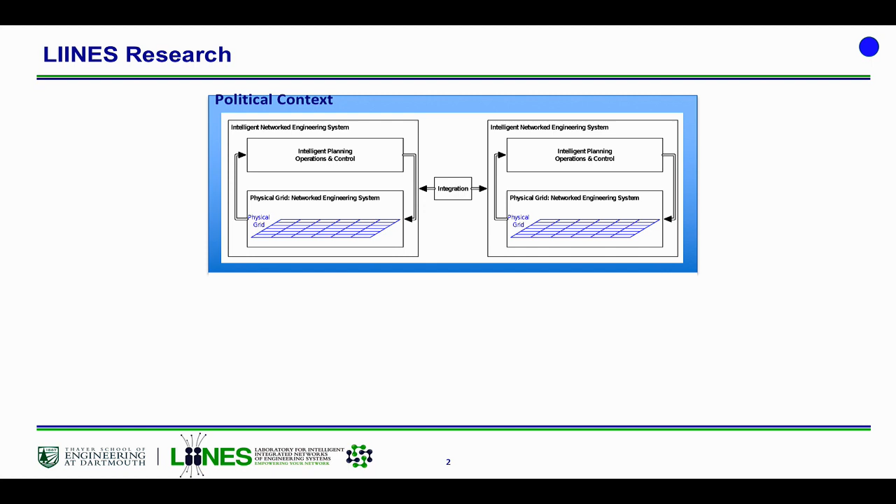Let me tell you a little bit about our lab. The LIINES, the Laboratory for Intelligent Integrated Networks of Engineering Systems, is really concerned with some sort of physical, large-scale network of some kind, and several different layers of planning, operations control, and decision-making on top of that. And if that's not all, what we really would like to do is integrate it with another physical system and other layers of planning, operations, and control. That has led to 5 different research themes that we tend to work on.

I'll be talking today about basically the smart power grids area, but we've also worked in energy-water nexus, electrified transportation, industrial energy management, and interdependent smart city infrastructures.

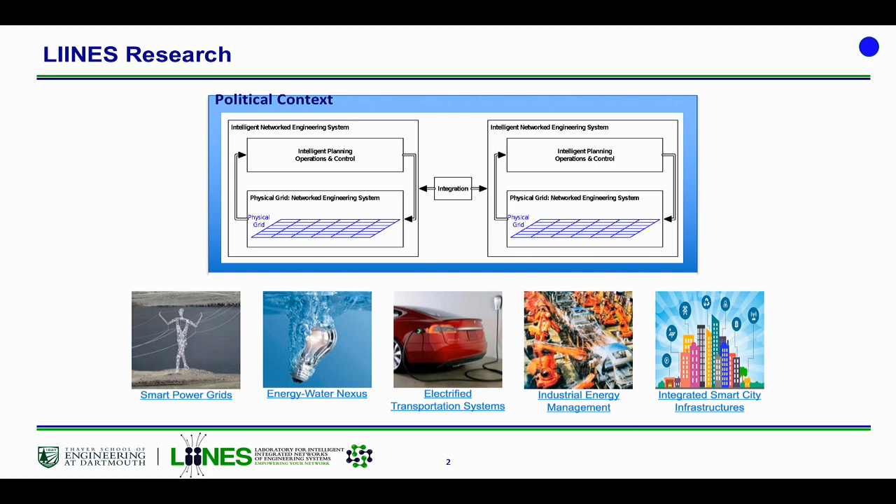Our goal today is to highlight results from the ISO New England Renewable Energy Integration Study. I'm going to cover 5 different topics: a bit of introduction, then background into how our electric power system works and what that means for the integration of variable renewable energy. Then we'll talk about our grid here in New England, the study results, and finally bring the presentation to a close with conclusions and final insights.

Every 7 to 10 years or so, independent system operators like ISO New England will conduct some form of renewable energy integration study. ISO New England did their last one in 2011 with GE Consulting and NREL. What they try to look at is changes in the generation portfolio and also changes in the transmission system. The methodologies for these studies have been evolving, and it's an area we've been working on.

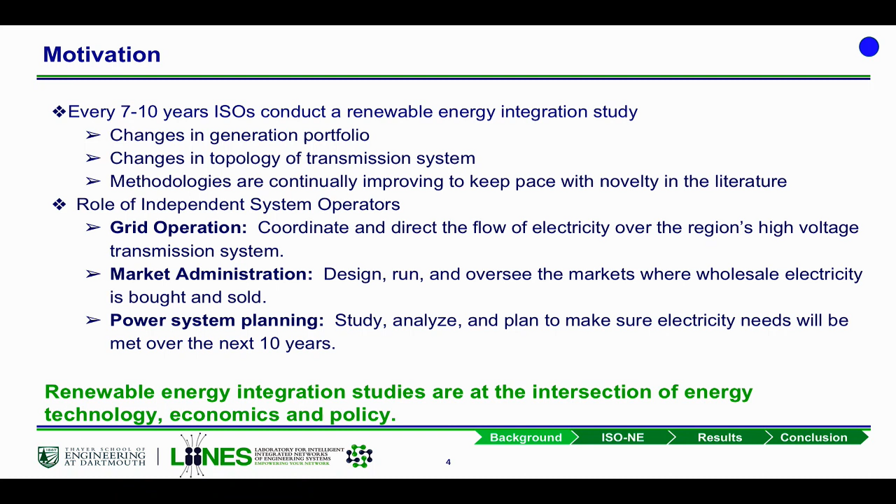Renewable energy integration studies are particularly interesting because they have a really nice mix of energy technologies, economics, and policy. So let me turn it over to Zach.

So what does this power system actually look like? For the last 100 years or more, it's looked like this. You have generation stations producing power. They're stepping up that electricity to high voltage for transmission across long-distance power lines. This reduces losses. Then, when you get to a neighborhood, you'll step down the voltage to a distribution system that goes out to your house or to the college. And in general, this is a one-way flow.

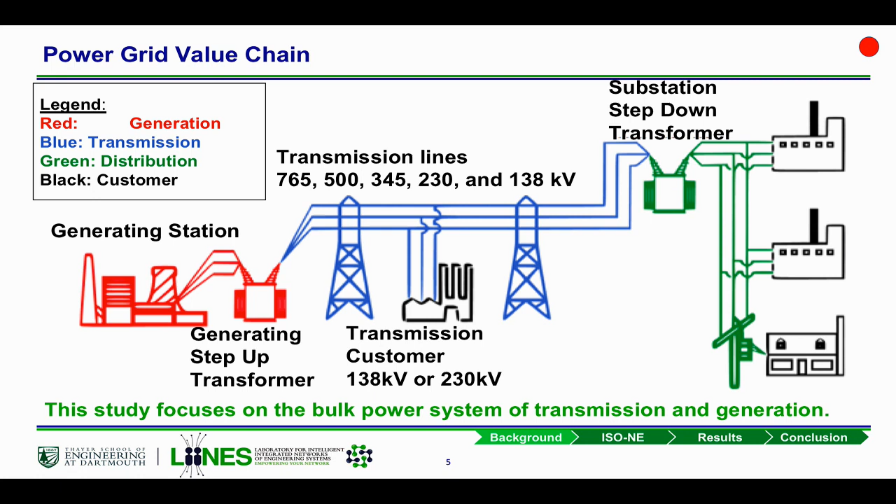And our study focuses from here backwards, generation and transmission.

So in addition to the physical power flows, there's also monetary flows in this system. These include basically an end user who's paying for their electricity to a utility. Then that utility has to pay the generation companies, and the transmission and distribution companies that all help get that power to the end user.

And this is where ISO New England comes in. They're a market facilitator helping to get from the utility back to the generation stations. This is kind of the key piece here that we're really trying to get into.

So you might ask, who cares about this? Why is this important? The key is there's a lot of people that care about this, even in New England. It's utility companies, it's the transmission and distribution system owners that own the wires that transmit the power, it's the regulators in each state that set rules about how much power can be produced or how it can be moved around, the generation companies that actually produce the power, and energy service companies that work with buildings to improve efficiency or provide demand response.

As well as environmental groups that might work with regulators and with utilities to produce renewable portfolio standards requiring certain amounts of renewable generation in each state. The key is that all of these stakeholders help define the scope, scenario, and assumptions that went into this study. Steffi will talk about how these are affecting things as renewable penetrations increase going forward.

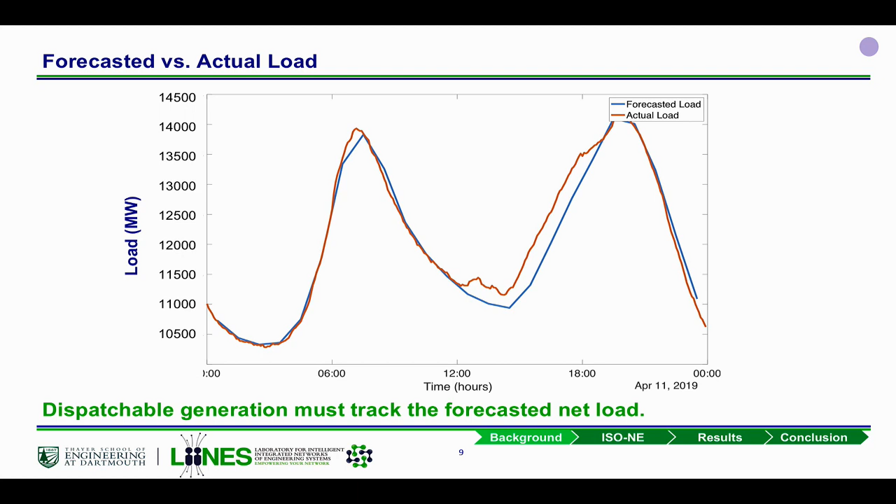As a result of the challenges posed by renewables, system operators usually acquire some reserves to ensure they meet net load variability.

Consider load following reserves: you have a natural gas power plant with a maximum power of 500 megawatts and a minimum power of 200 megawatts, currently producing 400 megawatts. This plant can provide 100 megawatts of upward load following reserves and 200 megawatts of downward load following reserves, which help with variability in net load.

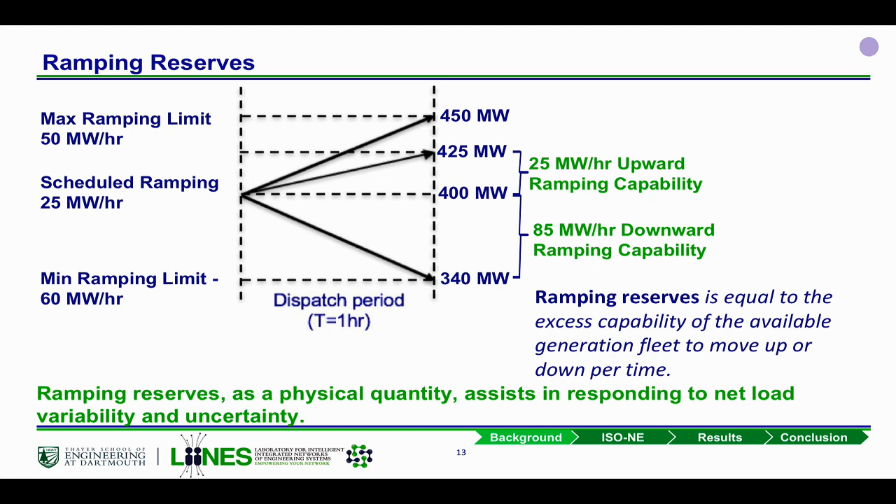Finally, we have regulation reserves, which are slightly different. Regulation reserves are more of an automatic feedback response that some generators are capable of providing, essentially the ability to move up or down from a set point, in this case 50 megawatts. Regulation reserves tend to be fast-acting, real-time automatic responses that quickly track load and imbalances in real time.

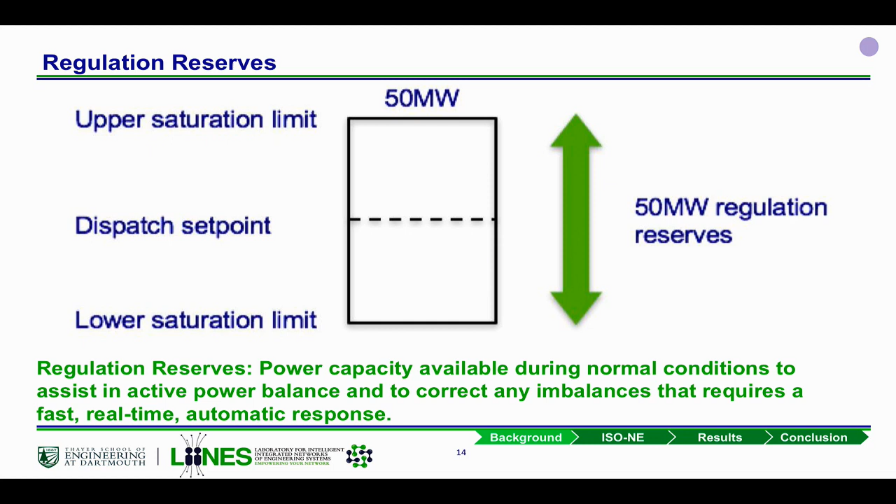Given these considerations, we developed the enterprise control simulation methodology, which captures the way the electricity grid is structured, both physically and how ISO New England functions. It comprises four cyber layers of control: day-ahead resource scheduling, same-day resource scheduling, real-time balancing market, and finally regulation service, all built on top of the physical power grid.

So Dakota will talk about the data used in the study. Thanks, Debbie. With a large simulator such as the enterprise control, it needs a vast amount of data to put through the simulation and feed it, and it's this vast amount of data that powers the different scenarios we will see in the study.

But where do these scenarios come from? In developing the scenarios, it's important to know where we're coming from, including identifying trends in the changing energy contribution fuel mix that makes up the electric grid. Specifically, over the last 17 to 19 years, we've seen a major increase in the amount of natural gas used, as well as an increase in the amount of renewables in the system.

That's part of what led the stakeholders to agree on 12 different scenarios for this study, 6 happening in 2025 and 6 happening in 2030. For this presentation, we'll focus on two of these: the 2025 conventional or business as usual scenario, and the 2030 high variable renewable energy plus, or high renewable study scenario. These two kind of bookend the scenarios we see.

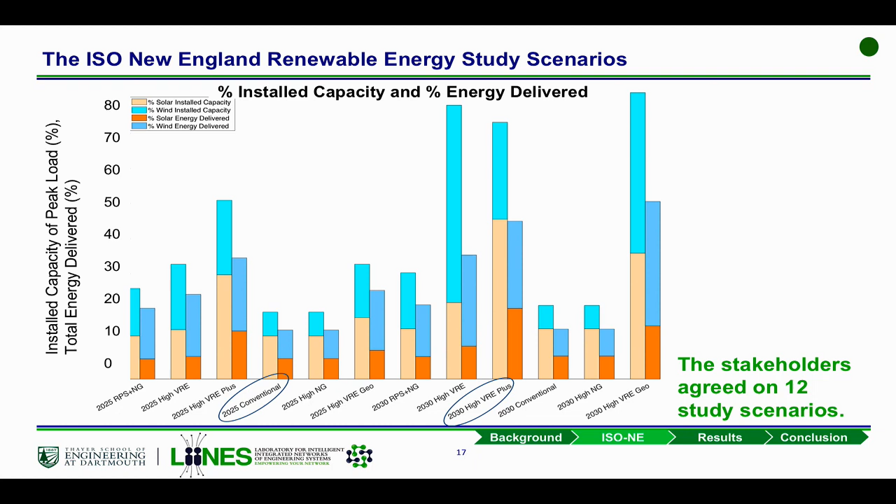Going forward, there's an important disclaimer: these scenarios are neither predictions of the future, nor do they indicate ISO New England's future plans. Rather, they represent 12 consensus scenarios that ISO New England stakeholders have collectively agreed warranted deep investigation.

Going back to penetration of renewables, we want to integrate them into the system. From the scenarios, we know how much renewables we want to integrate, but where are we integrating them? You want to place them where the wind blows and the sun shines in order to get the most use out of them.

Using a combination of GIS data, scenario constraints, and clustering algorithms, we're able to site these renewable resources according to the highest geographic potential. One thing to note is that this resulted in a lot of renewables being placed in northern Maine and down and around Rhode Island.

But the interesting part about having them up in northern Maine is that it resulted in a non-standard generation system, where the generation is far up in northern Maine, far away from major load centers that we would see, like down in Boston and including southwest Connecticut.

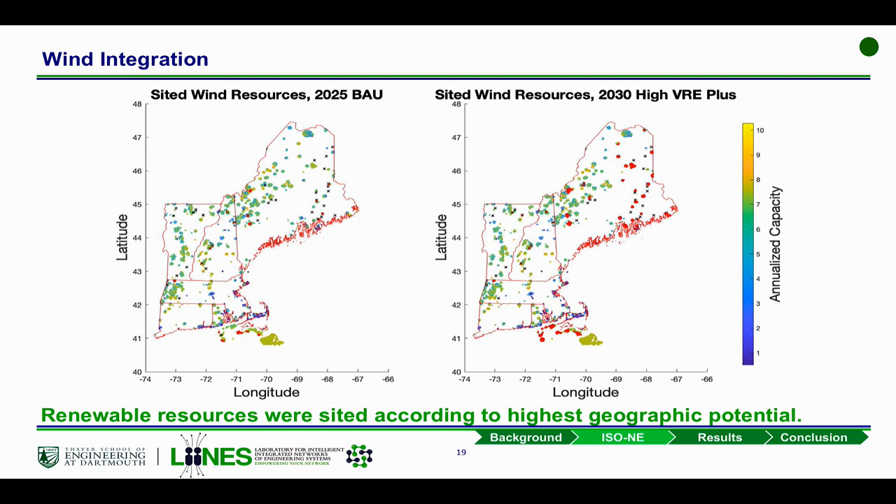And that poses some issues that we'll get into later on in the presentation. But to get that power down, that requires transmission.

And so here we see the New England transmission system. You'll notice there's not a lot built in up in northern Maine, but then as you work your way south, you have a major load hub in Boston and in southwest Connecticut. It's also worth noting that there are ties into New York, Quebec, and New Brunswick for this system.

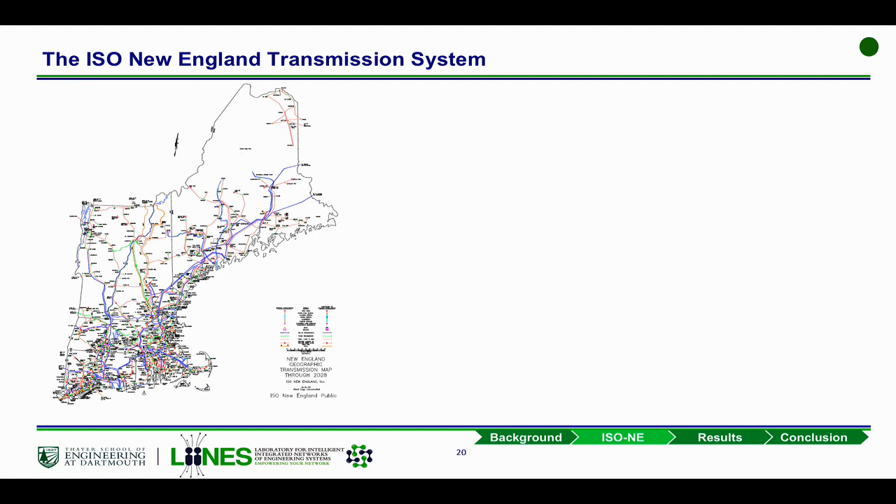Which can potentially pose issues when you're trying to force a lot of renewable power from up in northern Maine all the way down to a load center down in Boston.

Now, getting into these load centers, we're also going to need a lot of load data for the simulation. And here we're looking at the 2025 business as usual case. And you can look at load in really three different ways.

On the very top, we see just load as a function of time. It goes along through a whole year. And in the blue, we see the normal load. And then in the red, as Steffi had mentioned before, that's where the renewables have been subtracted from the load, and we get the net load.

Then just below that, we have a load duration curve, which is another way of looking at load. And basically the way to understand this is you take all your highest loads and you throw them all the way to the left, and then you take all your lowest loads and you throw them all the way to the right.

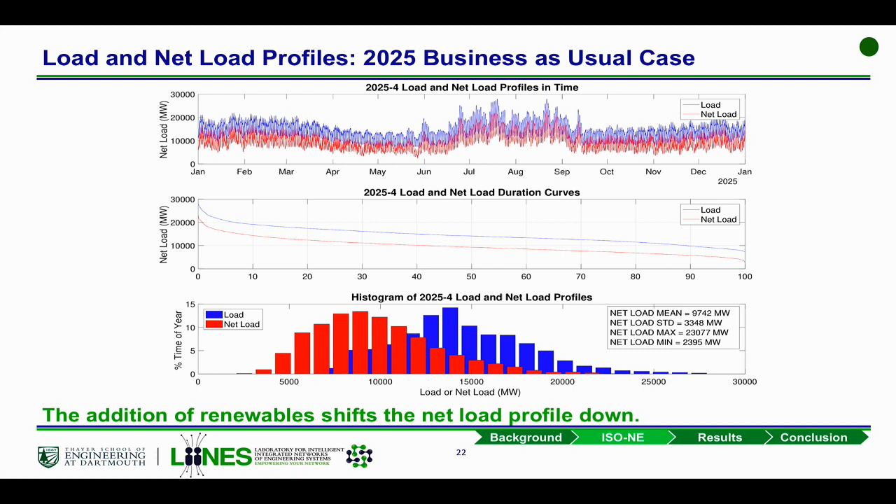Now, here we're looking at the same thing, except this is 2030 with the high renewable case. And one thing that becomes very interesting is if you look at the load duration curve, you can see this magenta line is at the net zero load.

That's where there's zero load on the system. And if you follow that all the way to the right, you can see that the net load actually dips below net zero. And that's where there's not enough demand on the system to meet the generation.

If you look just above the magenta line at the green line, that's about 3.5 gigawatts rounded, which is the base level of nuclear generation that we see in this study, where it was assumed by the stakeholders that the nuclear plants would be running 24/7 all year long.

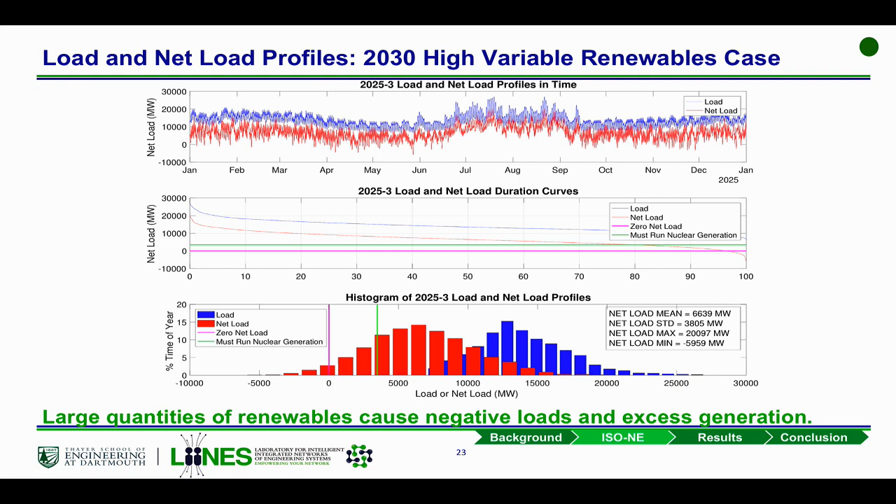So that raises the net zero up, and so that you actually get for about 15 to 20% of the year, you have excess generation. And so that poses some interesting things. And now I'll turn it over to Aram to tell us kind of what we found.

Thank you. Okay, let's get back to the simulations, just some computational information. This is the general representation of our simulation as Steffi represented. It mimics the ISO New England operations, and the optimization programs are implemented in GAMS, and the passing of information and data between different optimization programs is implemented in MATLAB.

And for this study, we run about 1,500 different simulation years with 1 minute time resolution, where each simulation takes about 2 days to complete, and each simulation produces about 500 megabytes of output raw data.

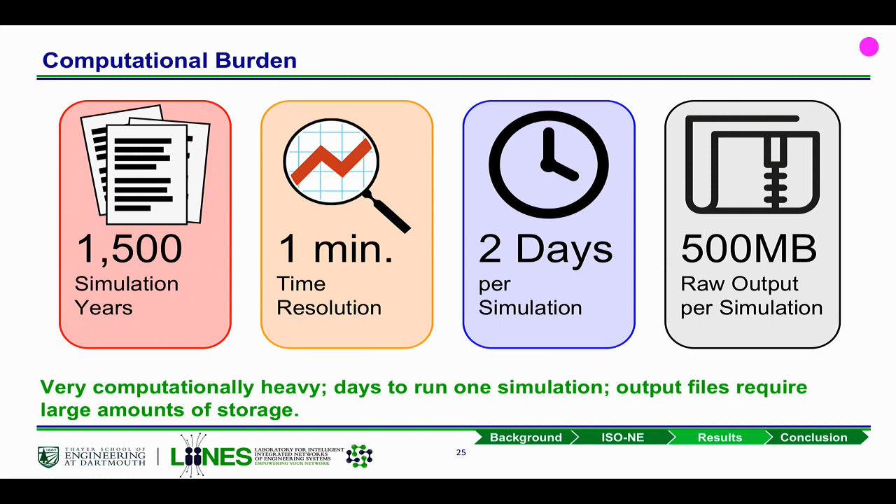All this combined with pre-processing of the data and post-processing leads us to several terabytes of data, which means that this is a computationally very heavy study.

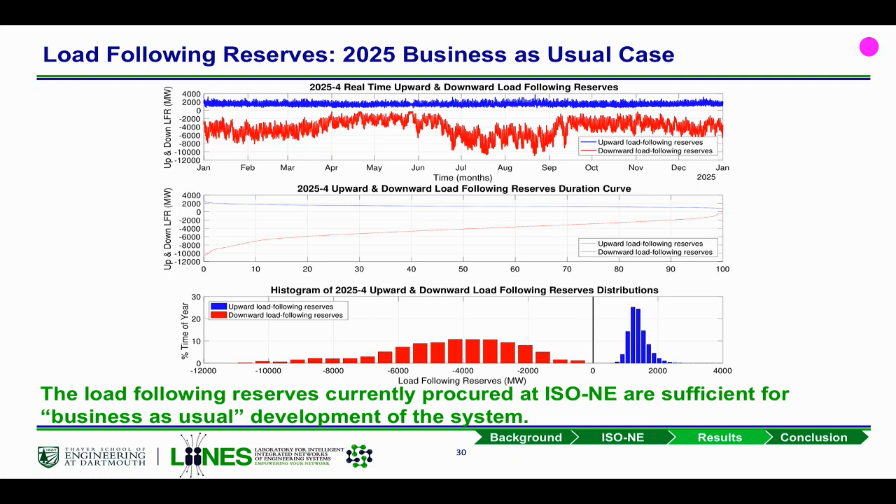Which is good news, because if this is the business as usual scenario and supposedly this is the way that the system will evolve unless something changes, the system is prepared to take the planned amount of renewables for 2025.

And the reason this happens is because a lot of renewables integrated into the system are replacing the traditional generation units. As Steffi described, most load following reserves are provided by these traditional generation units. Now since you don't have their presence in the system, you don't have all these ancillary services coming from traditional units, and they need to be replenished somehow else.

So the ISO needs to find a way to procure enough amount of reserves while at the same time continuing with the integration of renewables. Now going to ramping reserves.

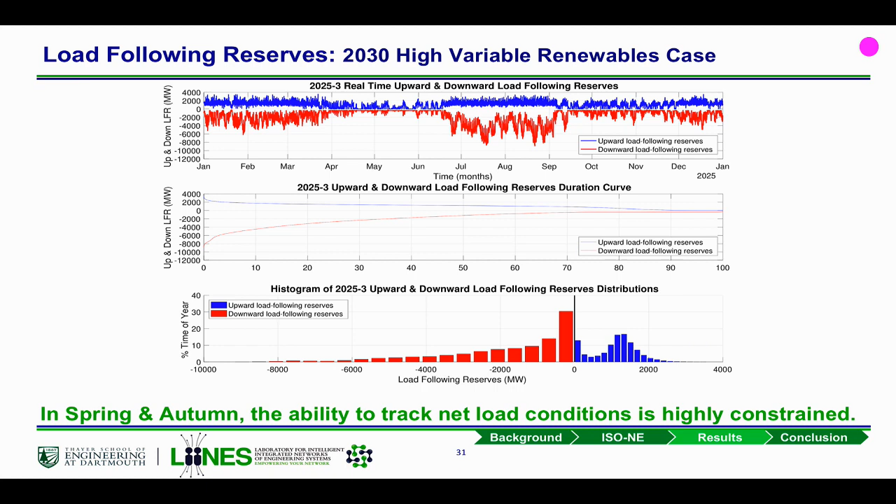So again, for 2025 business as usual, we see a similar picture: the system is ready. It can accommodate the renewables planned in the business as usual scenario for 2025, and system operators can just continue doing what they do and not worry about it.

But going into the high renewable scenario, we see that most of the time the ramping reserves are hitting a 0 megawatt value, meaning the system has a shortage of ramping reserves. This happens because of the duck curve: we get a steep increase in generation requirement, and most of the generation in the system isn't prepared for that steep ramp up. Also, since most traditional units are replaced by renewable units, you have fewer generators handling high demand, so they often fail to meet it.

This shortage of load following and ramping reserves happens especially during spring and fall, where your net load is low and you have less traditional generation in the system.

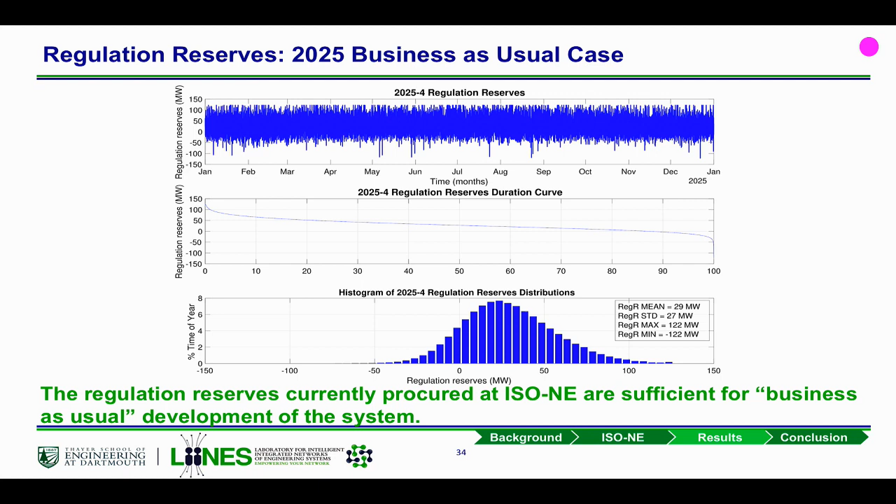Now the third and final type of reserves we looked at is regulation. Again, in the 2025 business as usual case, everything is fine, nothing is getting saturated. The system is ready to take the planned amount of renewables.

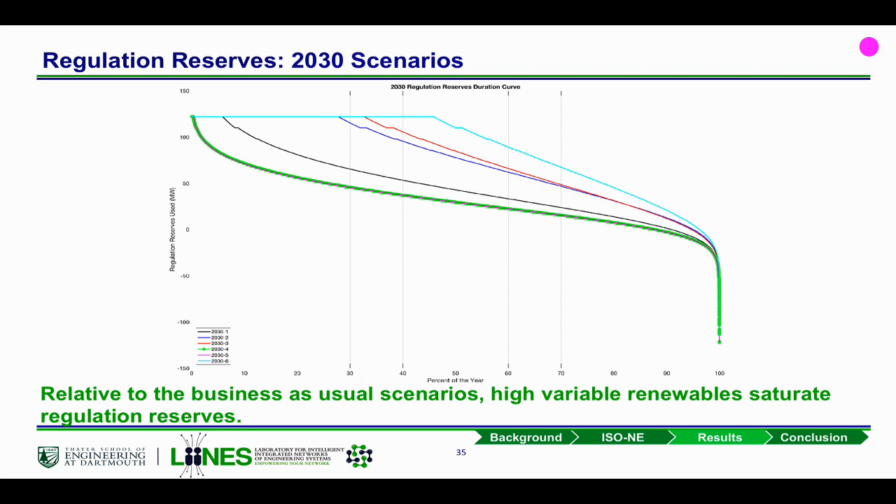So to summarize, these three types of reserves show that the system is able to accommodate some amount of renewables moving forward. But if we try to push boundaries, other technical challenges arise that need addressing. This is the reliability part of the system, because unless you have balance between supply and demand, your system will break down and not function properly.

Now let's look at the efficiency part of renewable integration and see how the renewables themselves are doing for different scenarios. One way to look at this is to check whether the system has congestion or not. The most important interface we're looking at is the flow from the northern area to the southern area, from northern Maine, where we have most of our wind generation, to the southern area where we have consumption centers.

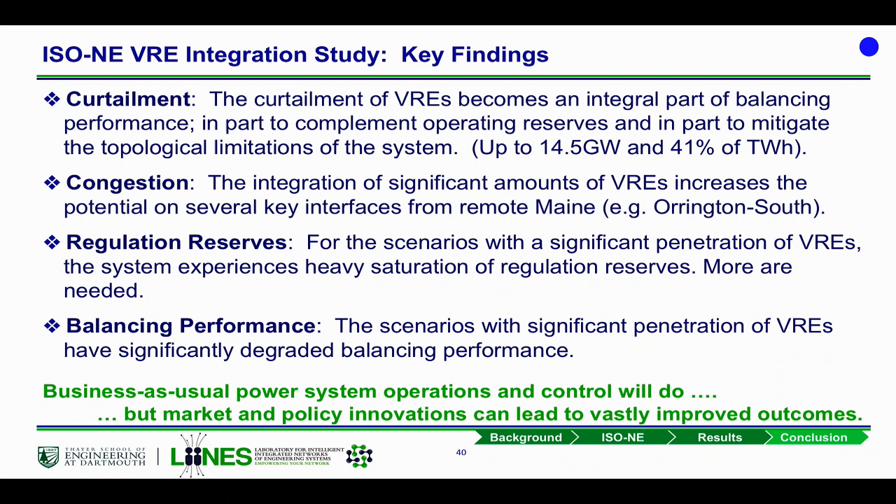But what we can basically say is that in business-as-usual scenarios, we're doing just fine, and we expect to get what we've always been expecting. But when it comes to the integration of renewables, you can't just expect to put that much energy onto the system without also making a whole bunch of other changes, particularly with market and policy innovations. So what might some of those changes be? It's important to think about that.

One is just the expansion of transmission from remote areas that would have a lot of renewable energy to load centers. Another is to treat curtailment as an actual type of operating reserve. If you're familiar with the mathematics, you'd find that the ability to control wind and solar generation in the form of curtailment is a lot like controlling a traditional thermal power plant in many ways.

We can procure more regulation reserves from a diversity of energy resources. Traditionally, those regulation reserves might have come from our thermal fleet, but we can also imagine demand response playing an important role with regulation in the future, and that's certainly an active area of research in the literature.

We can coordinate the scheduled maintenance of nuclear power plants. In this study, the stakeholders asked us to simulate that the nuclear power plants would be going flat out for 3.5 gigawatts all year round. But naturally, any type of generation facility has a maintenance schedule, about 6 weeks a year. You can imagine in those low load periods in spring or autumn, turning down those plants and giving them the normal maintenance you're going to have to do anyway, rather than doing it at some other time where it would not be as useful.

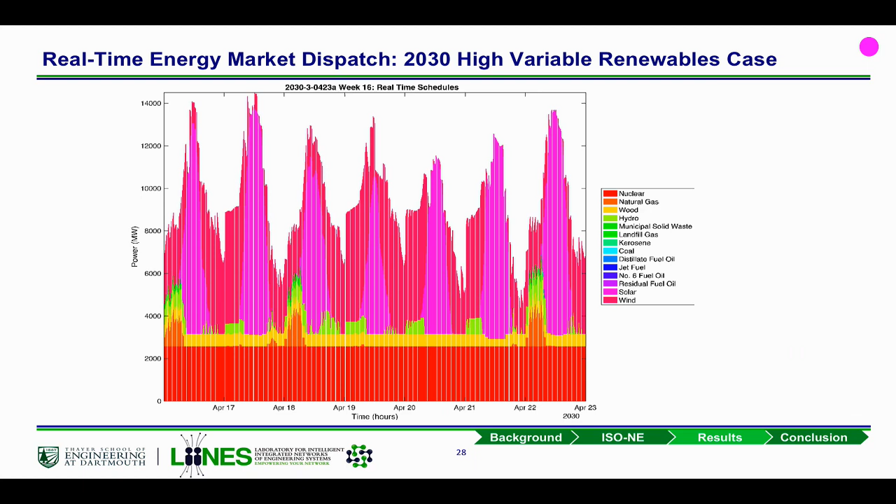You have the nuclear generation units going flat out. One recommendation I mentioned is that in April you have a whole bunch of sun and a whole bunch of wind. It would be useful to schedule the maintenance of nuclear power generation during these times, at which point this duck dive curve might begin to look a lot more like a traditional duck curve—it's remarkable to be calling the duck curve a traditional thing now—but that might be one way to do it.

It's difficult to imagine a future without nuclear generation, particularly as we think about decarbonization and so forth. They certainly have their role within the mix, but it's important to think about the collective of energy resources and coordinate them effectively so each one has its role in serving our grid.

In your simulation, thinking about the rapid response reserve that's traditionally been used for rapid changes in load—now we're applying it to variable renewable energy resources. But the traditional use is to protect against the failure of something like the largest generator on the network. Did you invade the rapid response reserves in your simulation, or were those set aside as protected?

Yeah, so the topic of reserves, which is at the heart of this study, is a remarkably complex one. When we talk about renewable energy integration, we focus on normal operating reserves—the load following, ramping, and regulation reserves. Another very important type is what's called contingency reserves.

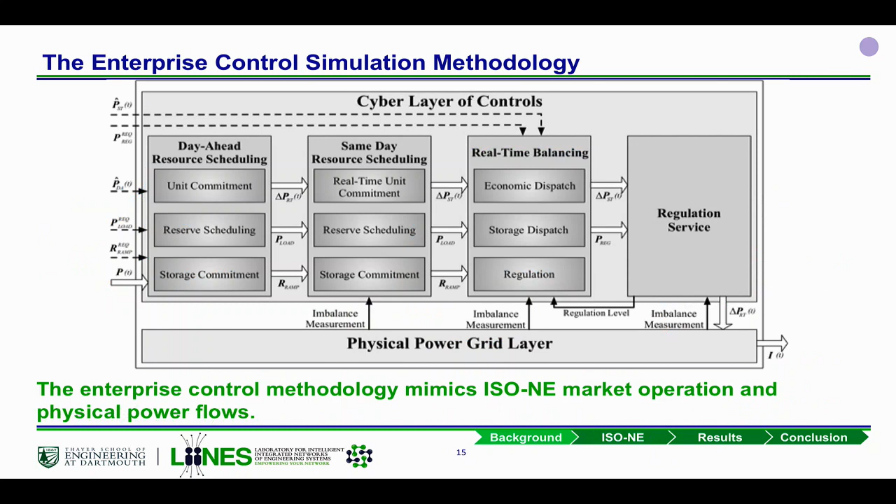Yeah, let me go back here. I'm really glad you picked up on that. Curtailment is going to become an important control lever, and we need to leave it there. But in many ways, it's leaving money on the table, right?

We can think of it this way: first of all, solar and wind don't have a fuel cost, so often in terms of how the markets run, they provide the cheapest operating costs. That's one benefit—they pull down costs in general. So you don't really want curtailment for that reason.

Second, if you were a developer of renewable energy, and let's say you were assuming your wind turbine was going to work 50% of the time, capacity factor of half, then all of a sudden you say, oh, I'm going to lose 40% of that — the cost rationalization or ROI rationalization for that wind turbine would be much less effective than what you had originally imagined. So that's another issue. And finally, they don't have any carbon emissions in operation, so if you have very aggressive targets for carbon abatement, curtailment is not exactly your friend. But in a sense, all of this is not really a surprise.

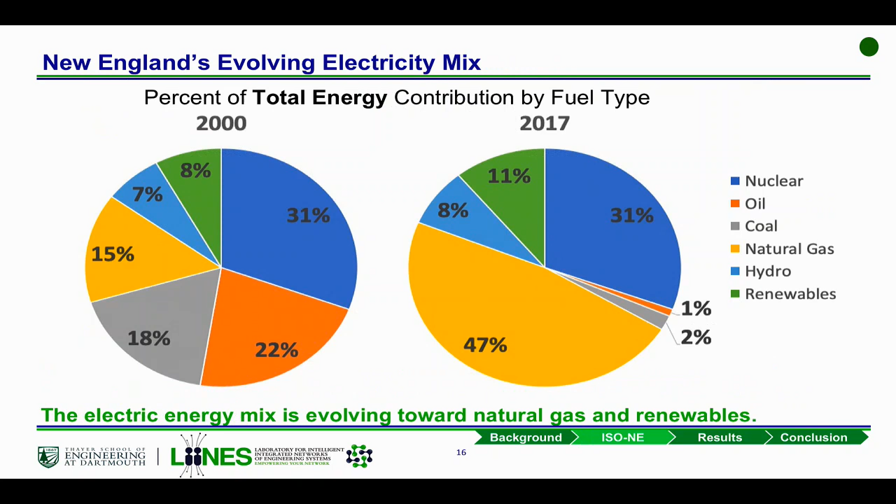This tends to argue for real-time pricing to end users, to encourage people to shift load off heating and fossil fuels. Yeah, so these are all really great ideas that we generally support.

And the cost of doing so would probably not be that great in terms of consuming the electricity. Obviously, you have to put in charging stations, but you have to do that no matter what. So when you start activating the demand side of the grid, there's a lot more you could do than you ever thought possible. It's sort of the open frontier of our future, modernized grid.

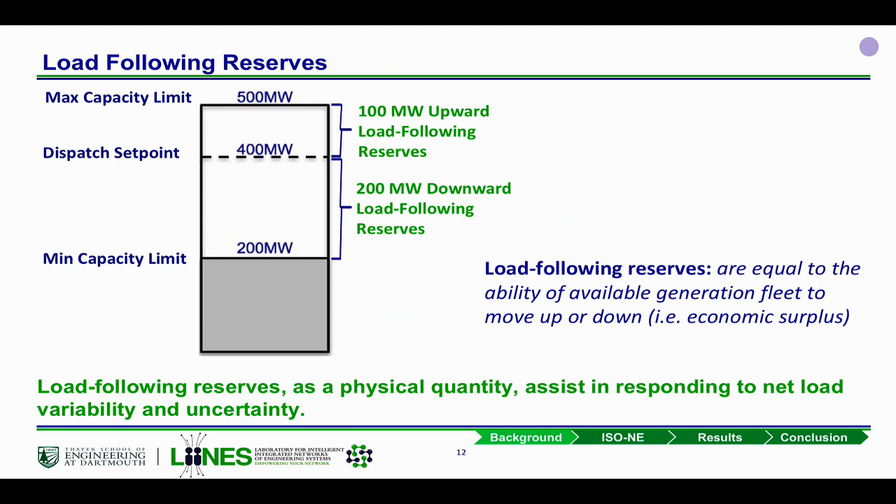That's where you had the imbalances. Yeah. Could you look at that slide as a summary of the overall problem? In many ways, right?

When we think about a renewable energy integration study, we can think about the economics, which we did not highlight here, partially because there was another study done directly by ISO New England, and I'm happy to give you the link for that report as well. And then, of course, the reliability impacts. The main issue here is balancing, and what we see with the business as usual operations paired with non-business as usual energy resources is that there's a challenge there, right?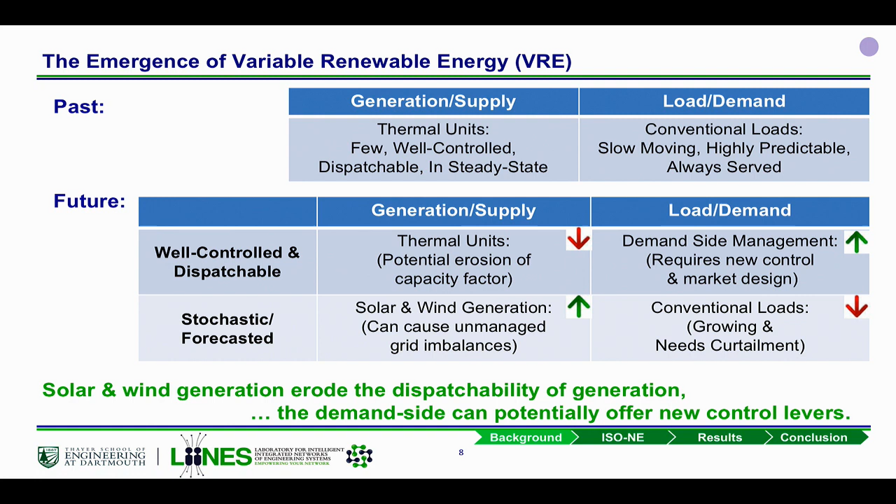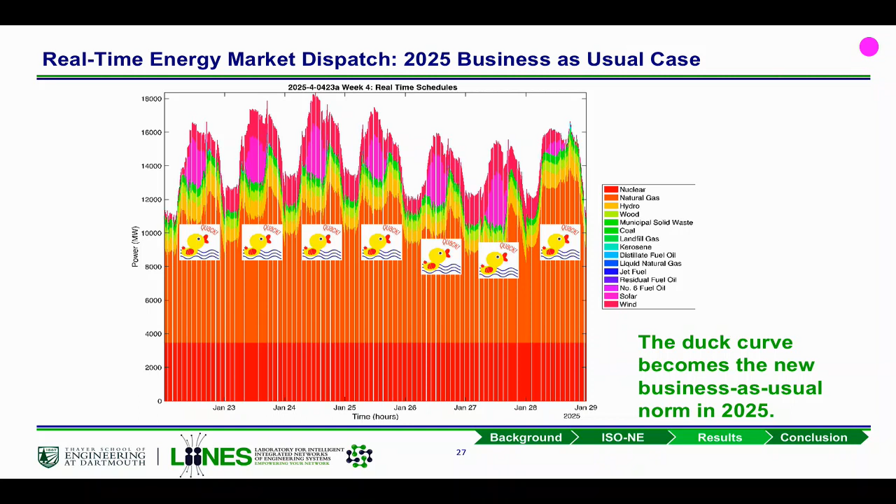The suggestion is potentially a radical one, but nevertheless one that I feel that as an academic I can ask. If thermal generation units, let's say natural gas or otherwise, can be incentivized or compensated for providing different types of operating reserves, whether it's load following, ramping, regulation, or otherwise, then there is an equity question of whether solar and wind can do the same.

It would take a certain amount of investment to be able to run these solar and wind facilities with the ability to respond and provide those types of reserves. So then why shouldn't they be compensated for providing that capability, away from their own self-interest but towards balancing the grid as a common good product? I think that's a really good question that we should be asking from a policy perspective.

Yes, just a little point—you said the stakeholders said that the power plants, the nuclear plants, have to run flat out all year, and perhaps it would be good if they did their maintenance in the spring and fall. I hope you're aware that that is when they actually do their maintenance. It's called the shoulder season, and that's when they have their outages, their maintenance procedures, and their refueling. It just seems like a very odd thing to say, hey, that would be a cool idea, when it already exists.

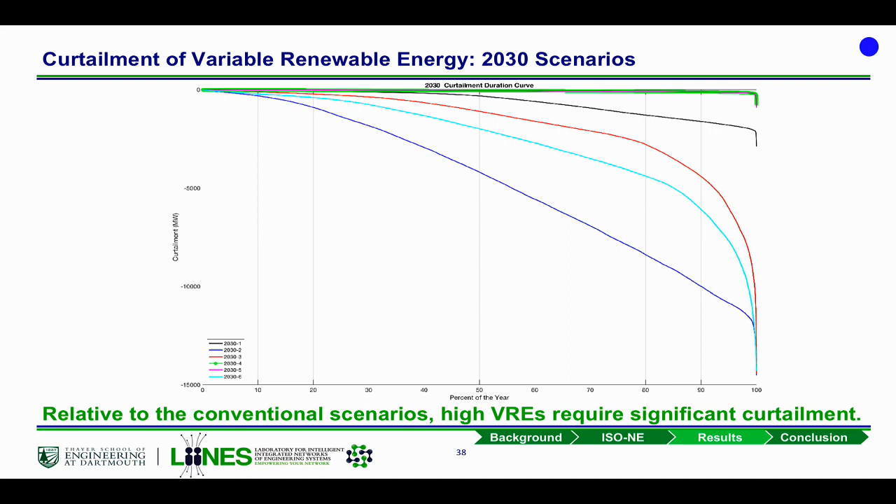I'm aware of the representation of stakeholders at our wholesale level. Okay, thank you everyone, and thank you again to my students who worked so hard on this.